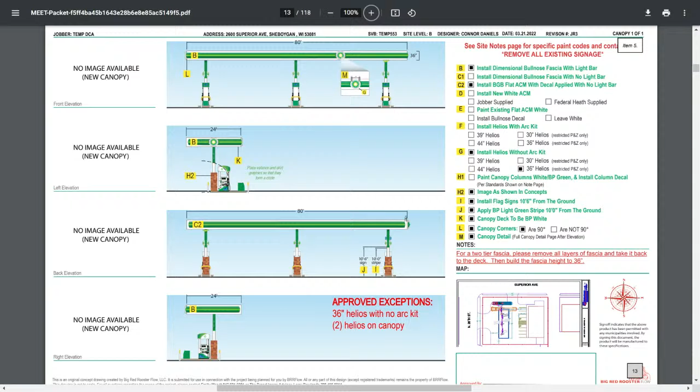Since the introductions are made, give us a brief synopsis of the canopy. The canopy will be following basic BP guidelines as far as design and fascia goes. One change we made was the Helios - we shrunk the Helios size to meet city standards as far as square footage, and kept it from extending above the horizontal plane. One recommendation the city also made when the building was presented to the board was to have matching building material used on the columns to wrap. We have that shown as a 2-inch thin brick veneer to match the base of the building, and the height we're proposing would be 3 foot to match the base of the building. That was up for discussion with Steve, so if there are questions, we can answer those.

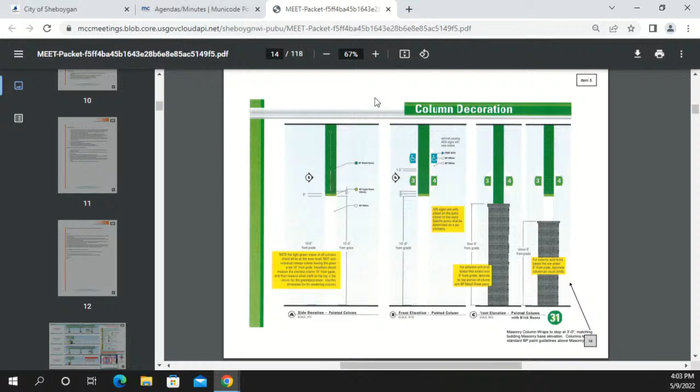I guess the 3 foot thought was to match the wainscot base on the building - the height of the masonry, to match the base on the building. On the building, it's shown a 3-foot wrap all the way around, but we've generally been preferring those on the canopies to go a little higher. I'm wondering if pulling off the height of your dumpster enclosure would be an option to go up to that 8 foot. I don't know how anyone else feels about that. No, I'm good with that.

And then sightlines on the mechanicals - I guess those were included in elevation, but it's hard to tell exactly how those would read. There are parapet walls on the building, so there would be about 2.5 foot of the mechanicals exposed from sightline. We showed a screening around the mechanicals to match the siding of the building using Hardie board with a pre-finished aluminum cap, just to match the building materials, shown on that elevation. Great, thanks, I'd missed that.

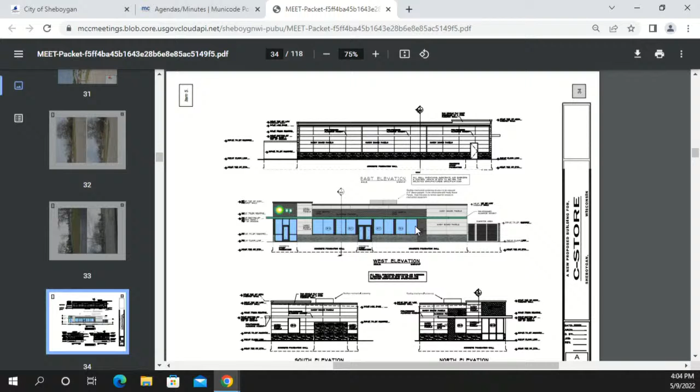I think that takes care of that one then. Any other thoughts or concerns from the board? No, appreciate you guys taking the

Recommendations to heart, and I move to approve, subject to staff recommendations. Second?

Any further discussion? I guess I would look to clarify staff recommendations versus the 8-foot height specifically, with that amendment. Okay, and our second, was you, Pam? Yep, that's acceptable with your second also?

So it's with staff recommendations, which is essentially what they've done, meeting our sightline requirements with the covering on the mechanicals, and then raising the masonry to the 8-foot to match the dumpster enclosure.

Any further discussion? No, hearing none. All those in favor signify by saying aye. Aye. Opposed? It is approved.

Thank you very much. I think our project— they're still here, these guys are up next too. Yeah, right, let me pull that one up here.

I guess we can skip the introductions again. If you can give us a synopsis of this one, please. This is for the viewing audience.

The proposed construction of a new multi-tenant convenience store and service station with a fueling canopy at the northwest corner of 15th and Geele. So we are proposing a 5,000 square foot mixed-use C-store, cafe, which will serve traditional Indian foods, and a UPS store, all of which will be run by the owner.

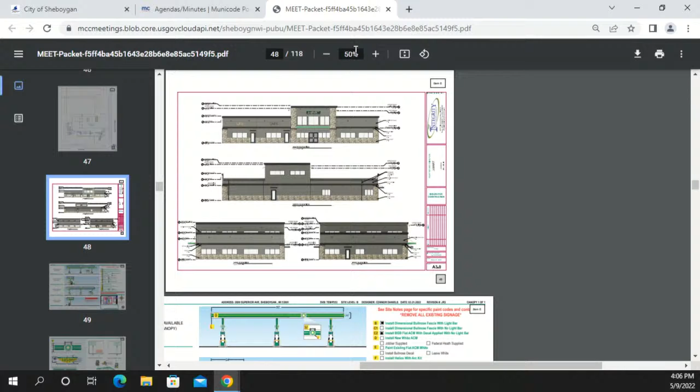There's going to be a second-story mezzanine that will be used as office space for the owner to operate his office employees. We're proposing a fueling canopy using like materials, wrapping the columns, just as shown in the 26 and Superior job. We're using the same building materials as shown on 26 and Superior to keep a uniform design for J-Marts going up across the city of Sheboygan going forward.

Yeah, that's pretty much a brief overview, if there's questions on that.

One thing that did come up in the Plan Commission meeting was the dumpster enclosure was recommended to switch materials to use a brick veneer shown. We have a Hardie board panel shown on the plans right now. The board had concerns about maintenance, so that would eliminate that. We're going to be switching that forward, so.

I'm scrolling through multiple sheets here. I guess first thing, thank you for working with the city. I know there was a lot of back and forth on the original design. Yep, so thanks for moving that forward.

Maybe same thing here, the height of the masonry at the canopy columns. If we, yeah, we can go to 8 foot as well with that, if that's what the city would like to see. Just looking to see what the height—

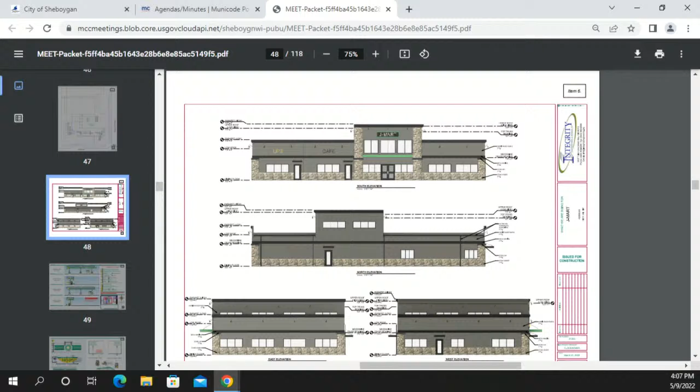We had shown at 3 foot, because it's the same base around the building. But if we want to keep that a uniform look, that's not a problem. Just looking to see what other elements, how high the piers, the masonry piers at the corners go. Those are 10 foot. I don't know if that elevation is shown on there.

The total height of your canopy to the underside is what? 18 and a half, was it? 18.5, yep.

Yeah, it looks as if by standards for the BP stuff, anything over 10 foot would start to interfere with their paint designs. You have to just switch paint designs once you get over 10 foot with the canopy wrap, which BP doesn't have a problem with. It just changes something on their end for their branding.

So I guess that would be something for input from the board, what height we would like the masonry on those columns. Is there any reason we wouldn't go with the 8 feet, like 26th Street? That would be fine. It doesn't necessarily relate to anything on this building, but I don't know that that's critical here for me.

Yeah, I think it's just closer to what it shows on the building. It's not as high, but yeah, it looks better than 3 feet.

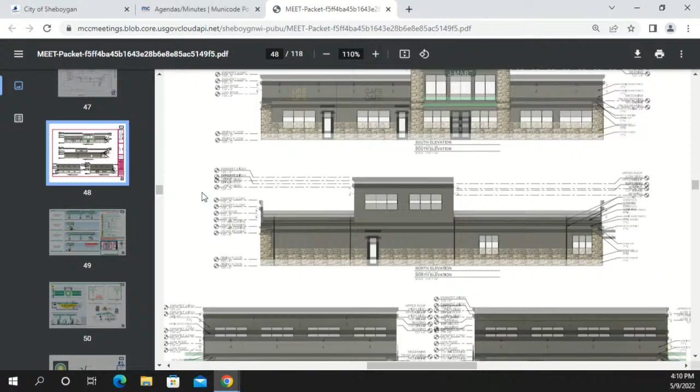That's just my thought. I don't know if anyone else on the board agrees with that, or if you're fine with it just being the thin detail at that front elevation for the two-story portion. That's facing the parking lot, okay. So, I think the wrap is probably more recommended.

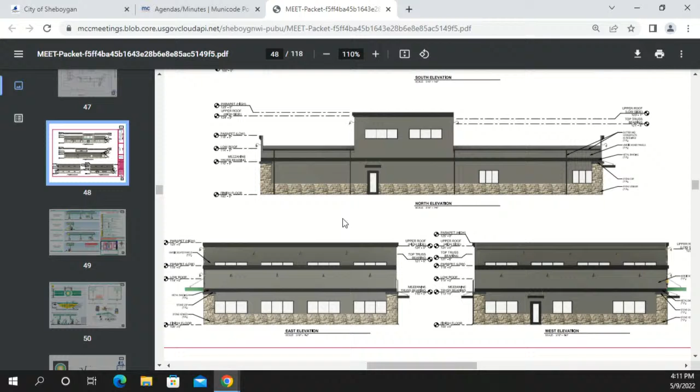And, what was the dumpster enclosure? I didn't see that on here. That was also one that was going to be Hardie board per Plan Commission, but we had a little discussion and it was switched to masonry like last time. Great. And then mechanicals for this one? Yeah, the mechanicals will be hidden by the parapet. It's a 4-foot parapet wall, so they will not be visible.

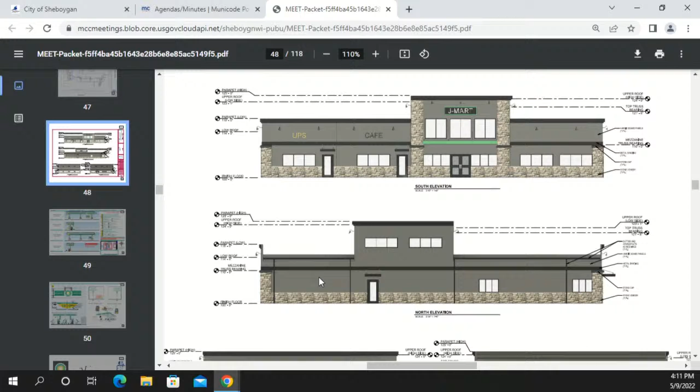Great, perfect. Any other thoughts, questions, or concerns?

Make a motion to approve with the wrap along the front of the building and the 8-foot height on the canopy.

We have a motion and a second. Any further discussion? Everyone's clear on the motion? In that case, with no further discussion, all those in favor signify by saying aye. Aye. Opposed? That one is approved.

Thank you very much. You have another one for us? I'll catch you later. Item number 7 is the proposed construction of a new entrance addition and exterior remodeling at the Sheboygan E-Free Church at 1710 North 15th.

If that team could come to the podium and make introductions and run us through what you're proposing there, please. Hi, I'm Ann Kuntz with Station 19 Architects, representing the church, and Daryl Menzer, master plan team from the church.

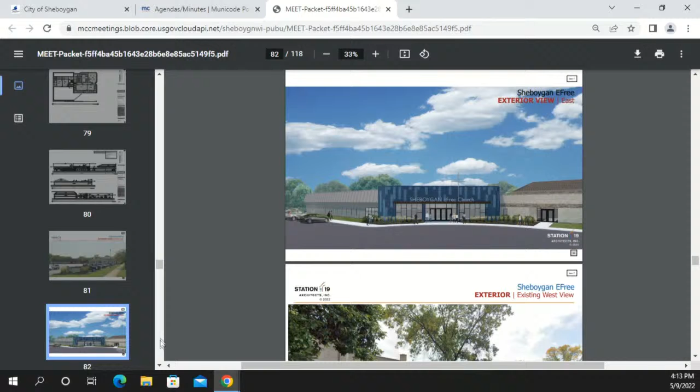All right, Steve is pulling up the images, but if you could give us a brief description of what's proposed? Sure, we are proposing the second phase in a 3-phase master plan, and that is to add a new entrance and expand their lobby. There's about 23,000 square feet of remodel interior, but we'll be putting a new entrance lobby to face Calumet. We'll also be looking at the west entrance where they had put phase 1 of the master plan, which was a new parking lot finished in 2019.

So we'll be augmenting the entrance over on the west side. You can see the blue siding that'll be going up there - that'll be Nichiha fiber cement siding. You can also see the new windows that'll be put in on that side going through to the classrooms to make that more visible. Currently, that's not with no windows at all, so we're looking to make that a little friendlier, especially to the parking lot that was approved by you all in 2019.

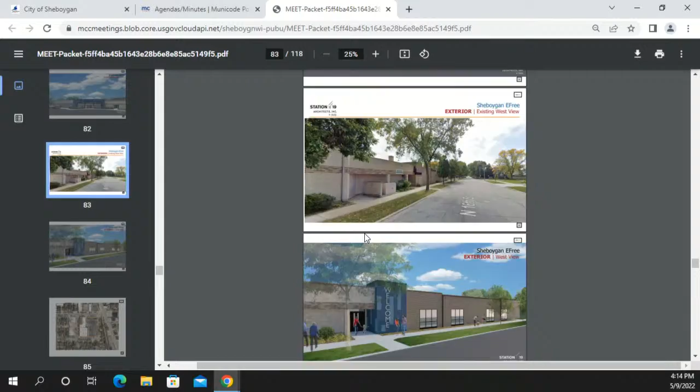I really had nothing on this one. Thoughts or questions? Pretty straightforward - no, it looks very inviting. I think you've done a good job.

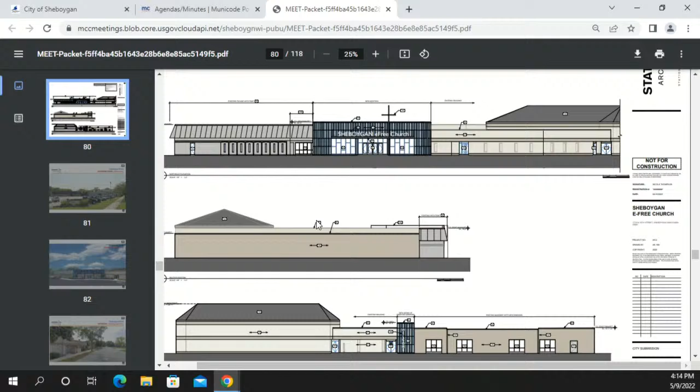I'd move to approve, subject to staff recommendations. Second. We have a motion and a second. Any further discussion? Hearing none, all those in favor signify by saying aye. Aye. Opposed? Motion is approved.

Wonderful, thank you very much. Good luck, always like to see churches moving forward. See you guys tomorrow. Yep, thank you very much.

And that brings us to item number 8, the proposed exterior remodel of Sheboygan Glass at 3209 South 32nd Street, the former KP Welding Building.

If that team could come to the podium and make introductions, even though we know you. Good afternoon, Steve Pesky, Distinctive Design Studio. And Mike Koenig with Sheboygan Glass and Glazing. Thank you.

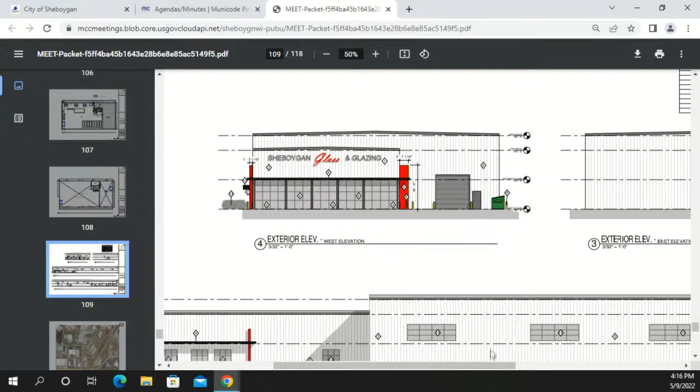Sheboygan Glass is currently looking into purchasing this current KP welding building and bringing Sheboygan Glass back to Sheboygan itself, so definitely fitting for the location. With that, looking to make some improvements on the existing rundown, mismaintained structure. Starting out with the entranceway, creating a new ADA compliant storefront, an entrance space to the front portion, or the southwest portion of the building. With that, incorporating a glazing wall that wraps around the south and western side of the building, which does provide that entranceway.

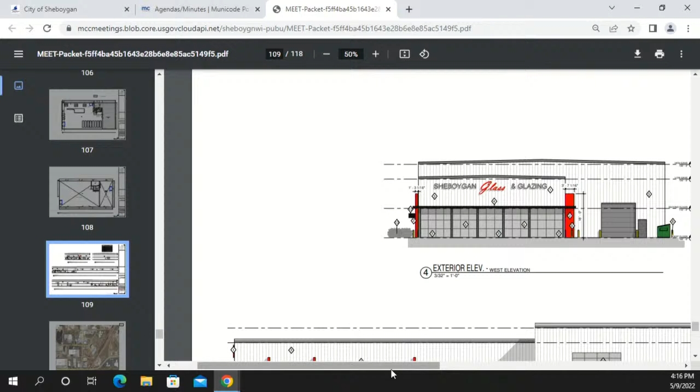Also above that glazing facade, bringing in an eyebrow roof, or a little roof line that does cover that entranceway and over the glazing itself. Majority of these updates for that initial front entrance will be done or proposed to be done within the coming year, but then going beyond over the next 3 years to slowly implement other updates as far as overhead doors to be updated, other exterior paint to be updated on the buildings, other openings and glazings, and the overall roof structure to amortize it over the next 3 years is what we're proposing.

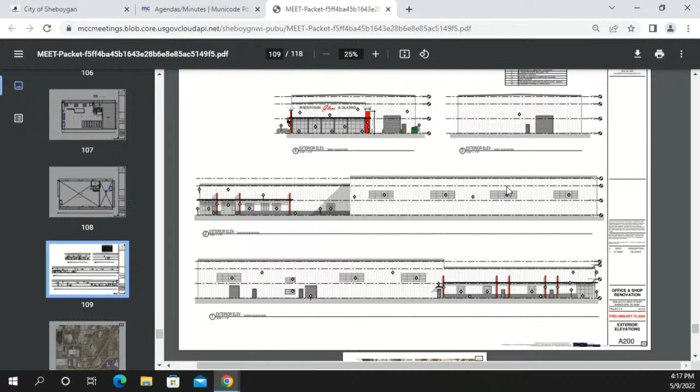Also, in regards to just site improvement, new asphalt or updating asphalt as needed, and also ADA parking, striping, and employee parking lot area.

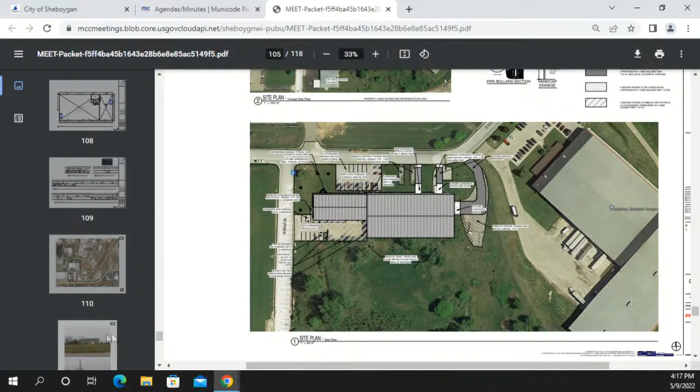I don't know if everyone's familiar, this is the former KP welding building. So you can see some of the photos before you right now in terms of its present look and design, with lots of mechanicals that may not, I'm assuming, be used as part of this, and I'm guessing maybe removed as part of anything that's not required. But you can see here that this is going to be a significant upgrade in terms of design and site improvements. So I think the big thing that was mentioned is the phasing component to it.

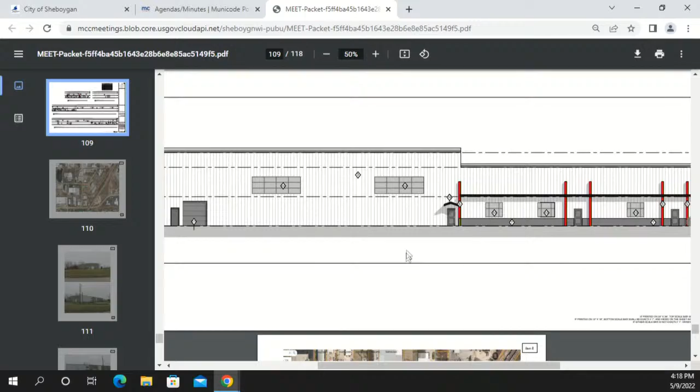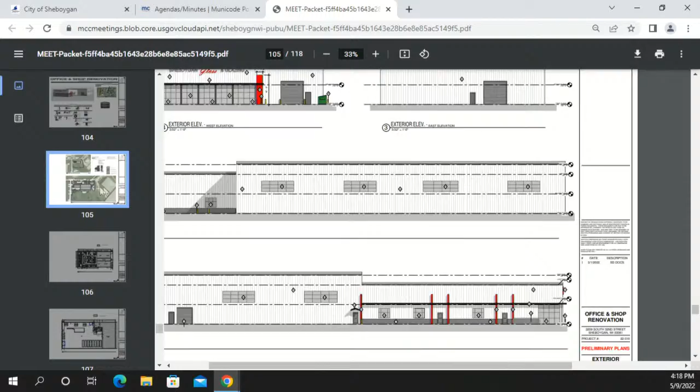And so if anyone has any questions on that, it sounds like obviously this front section would happen right away. And then some of these other items over time with some of the site improvements, I think they're looking at potentially a multi-tenant use of the building where there may be some additional square footage on the east side of the building on the site plan that you can see. So there's a decent amount of square footage over here, it's about 5,000 square feet.

Gotcha, future tenant space. So that would be this east end. And so those types of improvements, they were kind of looking to extend out, and as a tenant came in, some of the improvements as far as paving and things like that. So some of those conditions will be discussed at Plan Commission tomorrow, but those are some of the things that we're taking a look at.

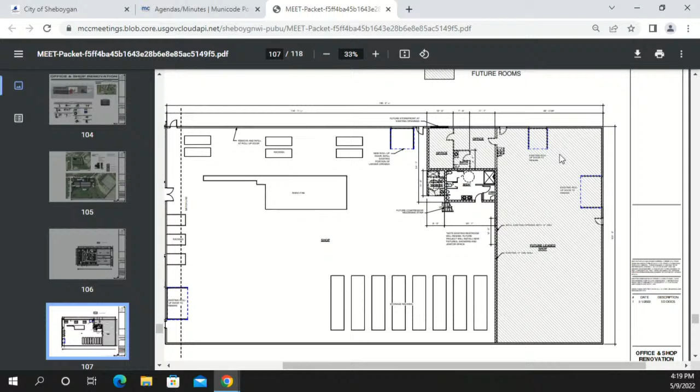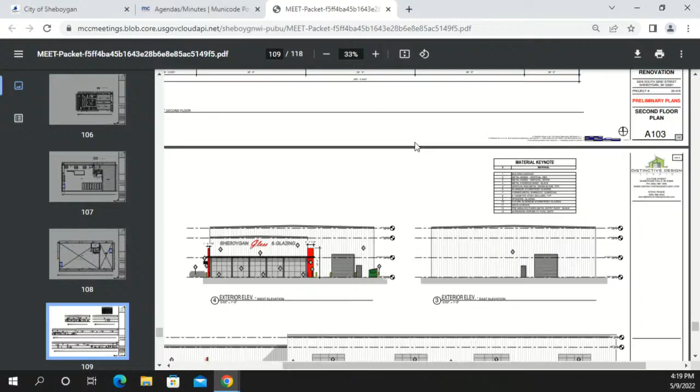It's a tired building, and they really are showing, I think, some nice improvements, especially to the street frontages and to the side, so it's a pretty visible site. And I think the improvements are welcome as far as also having Sheboygan Glass back into the community as well. Agreed, I would echo all those statements, Steve. Thank you, I didn't have a lot of questions on this one.

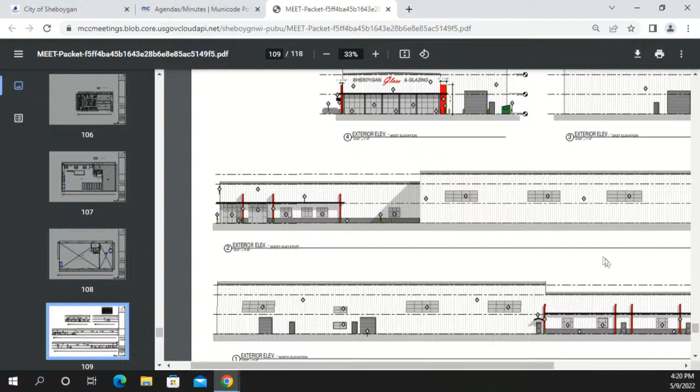My one question was on the red fins that are called out as metal siding. Just curious what that product is. Is it a narrow product? Are there joints in it, or is the panel just a single piece? It'd be a single piece panel, single piece metal siding. And the corner detail, is there a wrap to that? Is it a reveal? What happens at the corner? At the corner, there'd be a corner post per se of typical metal siding.

And flashing cap over the top of it, is that a separate element or is that integral? That'd be separate elements. Same color? Same color, yes, so the whole thing blends in as a red fin? Correct, no striping to it, yes, kind of models after their logo and things like that.

Yeah, it's simple, clean, and gets your attention. This is Mark, Matthew's son here too. Hello, hello. I was thinking we were last on the agenda. My bad. You are, yeah. Yeah, we don't mess around. Guess so.

Any other questions or concerns from the board?

I just didn't know if maybe they could explain some of the mechanicals on the side of the building, what the thought was with some of those. The elevations that you show are really nice, clean, crisp elevations.

I guess how quickly are things getting cleaned up? There will be 3 small condensers alongside there. There'll be HVAC units inside, and then they'll be screened by landscaping on the side. That's why they show a couple tree plantings along that, so that's just small condensers that will be on the side of the building there.

So nothing hanging off of it. Sorry Steve, which side is that? That's on the North side. So that would be the Crocker side? Yep. So we've got some mechanical rooms on the inside of the building there, which is probably most visible.

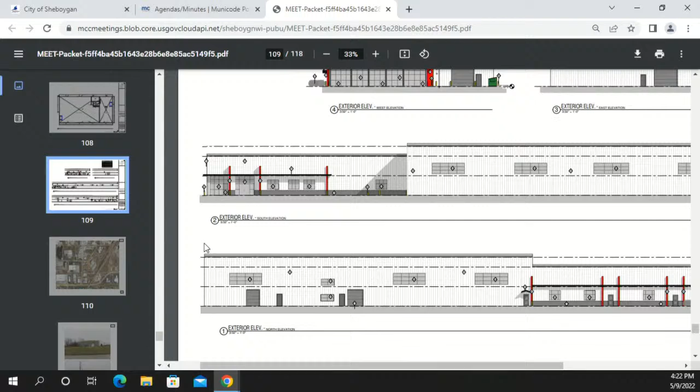Right there, Steve? Right there, yep, towards the bottom. This one? Yep. And then we have the large tree on the corner, which kind of cuts off vision turning east there, so we're taking that down and doing some other landscaping setback and ground cover against the building, because the entrance comes in on the west side right now, that will actually be coming in on the south side. So we'll be able to landscape along the west face and then wrap it around on the north side.

Steve, can you show the photos instead? Sure.

Yep, that would be over here, the future tenant, right there in the corner. Same thing, yeah. Pretty much what's white right there, that would be the sectioned off tenant area. And not knowing what that tenant space is, that's where the doors are kind of in limbo there, and also with creating the dock space on the north face also.